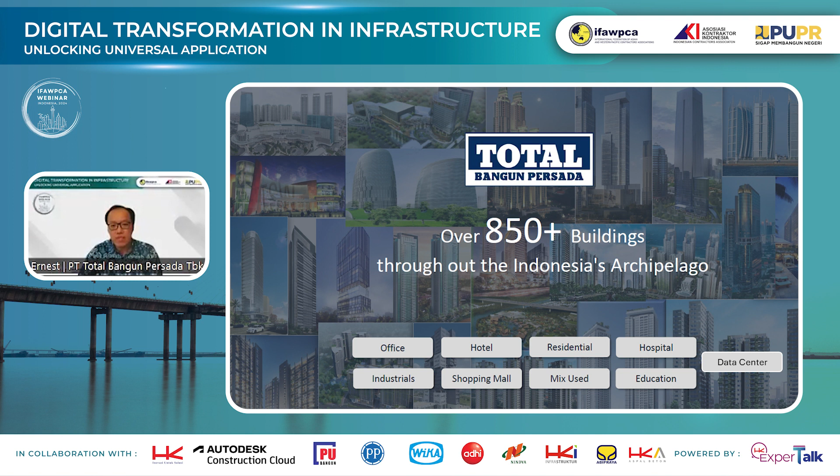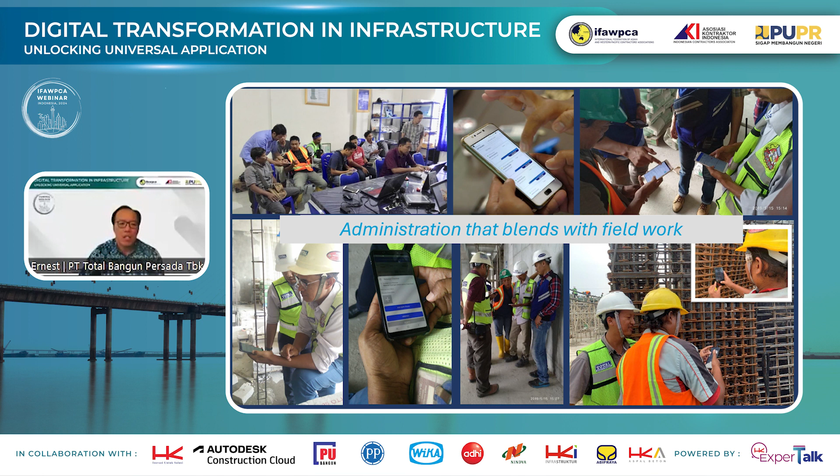So the administration blends with field work. What is actually changed in digitalization? I think there are 5 things that really change in digitalization. First is compliance - in digitalization, there is no procedure that is missed. Every process has to be defined in the system, so it must be complied with.

Strong planning - each process is performed sequentially, so the initial process determines the next process, so there must be strong planning. Digital readiness - no matter how good and sophisticated the technology is, only developed people can utilize the digital technology properly.

Transparency - in digitalization, every process has a digital footprint: what, who, when, how. So there's a timestamp in the system so that the data can be trusted - data driven. In digitalization, every process will be recorded and it will become big data, even from external parties. The big data can be analyzed and can predict future conditions to make decisions for business.

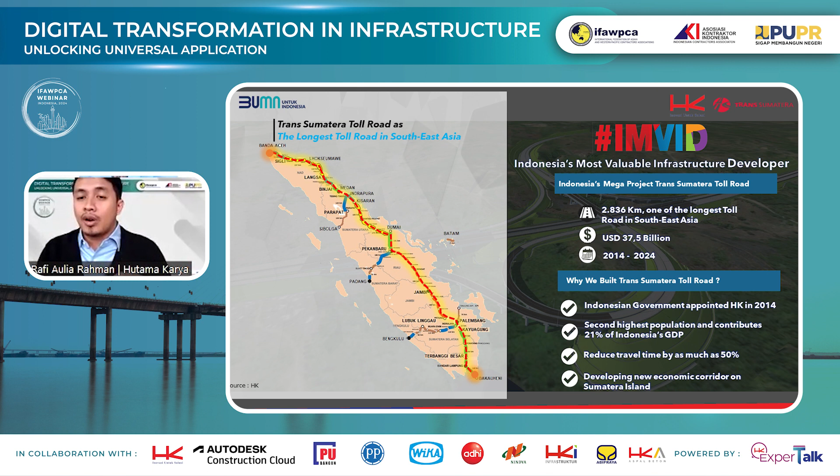So why did we build Trans Sumatra Toll Road? Besides the Indonesian government appointing Hutama Karya in 2014, Sumatra Island is the second highest in population and contributes 21% of Indonesia's GDP. The Trans Sumatra Toll Road can reduce travel time by as much as 50%, and is for developing a new economic corridor on Sumatra Island also.

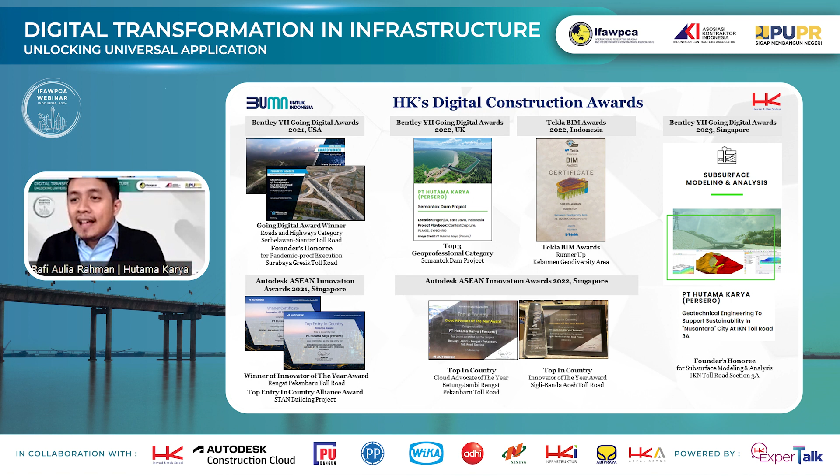Since 2020, Hutama Karya has been implementing building information modeling, and during 4 years of implementing BIM and digital construction, we have won several international awards, like from Bentley in USA in 2021, ASEAN Innovation Award 2021 in Singapore, then in 2022 from Bentley in UK, Autodesk ASEAN Innovation Award in Singapore, and Tekla. In 2023 we also got an award from Bentley in Singapore.

Besides that, Hutama Karya also carries out research and innovation in building information modeling and digital construction, and we achieved several awards in 2022. We won 2 Best Paper Awards in the field of digital survey at ConVR 2022 in South Korea. In 2023, we got a Best Paper in the environmental and sustainability category regarding carbon emission and digital twin at ConVR 2023 in Florence, Italy.

So now, how about the Sigli-Banda Aceh Toll Road project? This is one part of the Trans-Sumatera Toll Road, and Hutama Karya is the owner of the project. Because Hutama Karya is the owner, there are big differences between the owner perspective and the contractor perspective.

One important thing that makes a big difference between the owner perspective and the contractor perspective: if we are the contractor, we will talk about the contract value of the project. But because Hutama Karya is the owner of the project, we will talk about the investment value. Sigli-Banda Aceh Toll Road project has an investment value up to 833 million US dollars, or equal to 13.55 trillion rupiah. You can imagine how huge or how mega this project is.

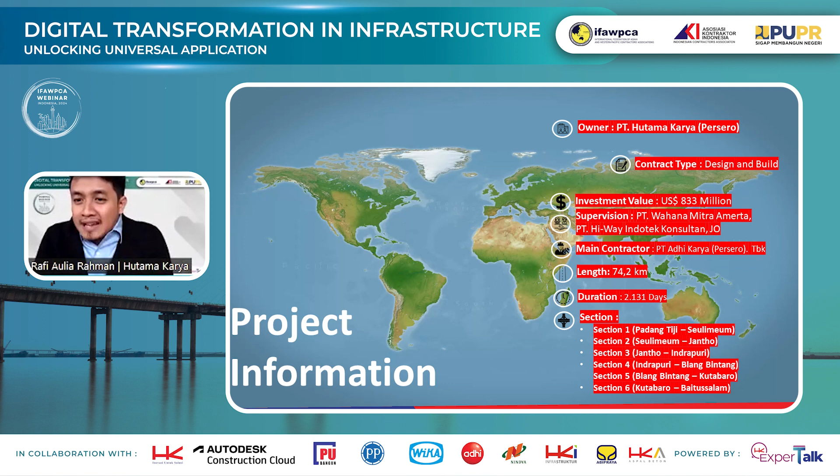Sigli-Banda Aceh Toll Road project connects from Sigli to Banda Aceh City with 74.2 kilometers length, divided into 6 sections, starting from section 1 in Padang Tiji until section 6 in Baitussalam. Nowadays, the project is fully operated from section 2 in Seulimeum until section 6 in Baitussalam, whereas section 1 is under construction and expected to be completed by the end of September 2024.

Sigli-Banda Aceh Toll Road project is very beneficial, as it can reduce travel time from 2-3 hours to just 1 hour.

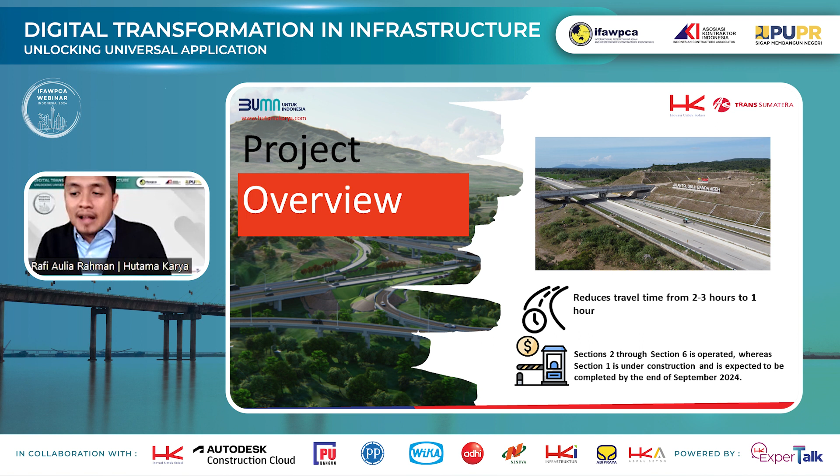Who are the stakeholders involved in the project? First, absolutely Hutama Karya itself. As the owner of the project or appointing party, Hutama Karya has an obligation to manage the construction process and the operation, as well as the maintenance of the toll road.

We have 2 specialist consultants: first is Wahana Mitra Amerta and Hi-Way Indotek consultant as supervision specialist consultants, and Virama Karya as independent quality consultant. To complete the whole project life cycle, our main contractor is Adhi Karya Persero. Adhi Karya has to design the model, submit the documents, and construct the toll road as well as the local design.

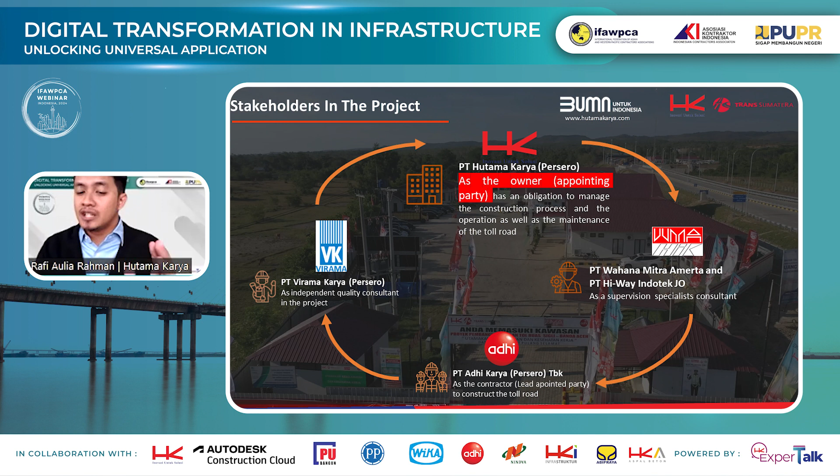Now, Sigli-Banda Aceh Toll Road project faces several challenges. First, it has a complex scope of work. With 74.2 kilometers length, we have extreme topography, and we have to construct 6 interchanges, 7 toll gates, 47 main bridges, and other structures.

And it must be completed within 2,131 days. So with the limited time, it requires accelerating the design process.

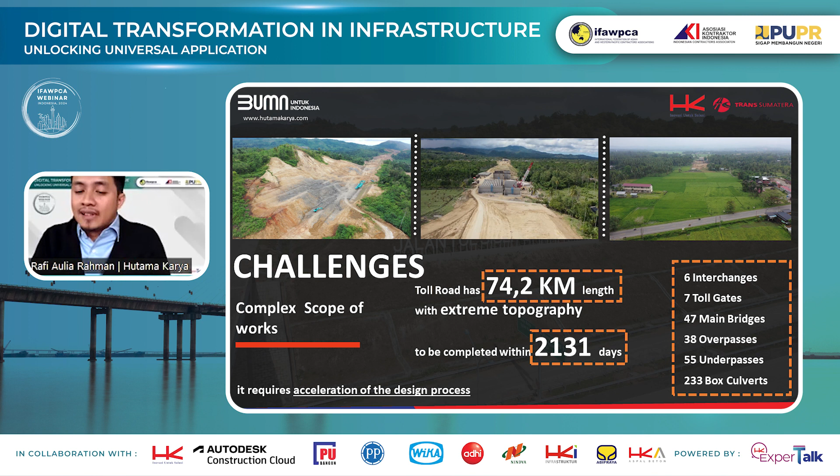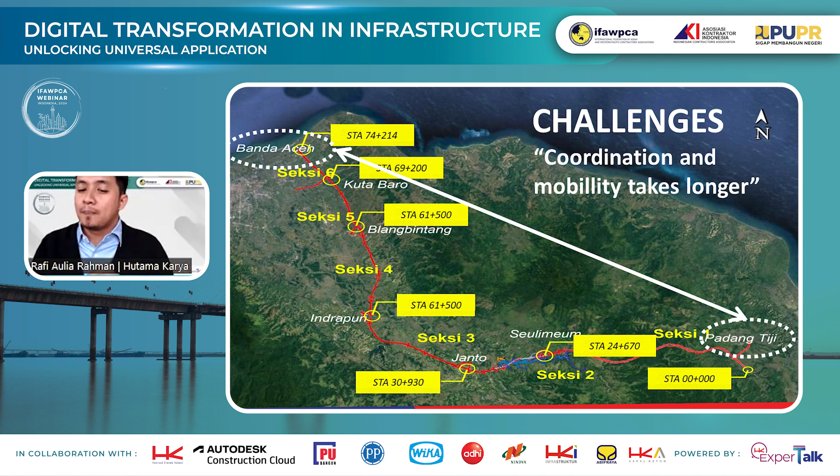With the 74.2 kilometer Sigli Banda Aceh Toll Road project, coordination and mobility takes longer because it takes up to 3 hours to get from the first kilometer point to the 74 kilometer point by car. So we require a strategy to optimize coordination and efficiency for sharing information and data between stakeholders.

Sumatra Island is one of Indonesia's islands that serves as animal habitat and protection forest. But in fact, there are above 130,000 hectares of deforestation in Aceh based on data between 2015 and 2023, reducing the animal population. So the Aceh Government and Natural Resources Conservation Center in Aceh require us to protect animal habitats affected by the toll road construction, so we need to collaborate and modify several designs to accommodate it.

Hutama Karya collaborated with other institutions to enhance the design. Hutama Karya appointed Adhi Karya as our main contractor to adjust several crossing designs and develop crossing designs for the sustainability of animal habitats using 3D model building information modeling.

The first modification is elephant bridges, allowing access from one side to the other through the bottom of the bridge. Second, we call it reptile tunnels, which involves changing the bottom of the box culvert so the humidity is designed to match reptiles' habitat. Third, we have an overpass for primate crossing, which becomes the most unique animal accommodation and will be initiated for the first time in Indonesia.

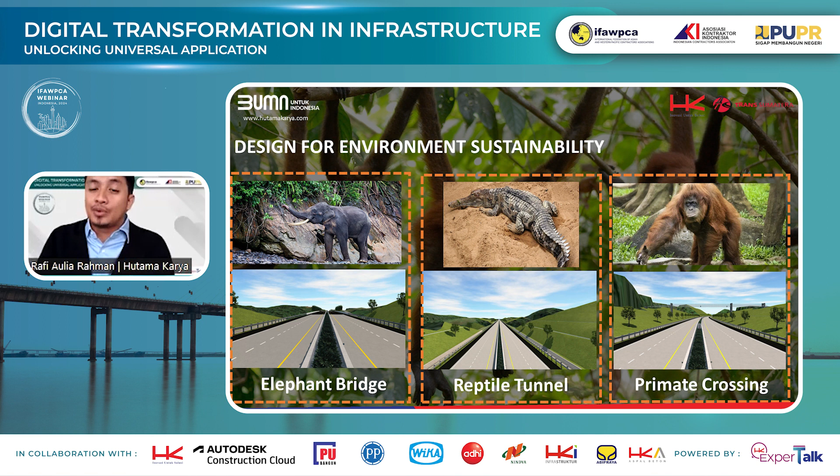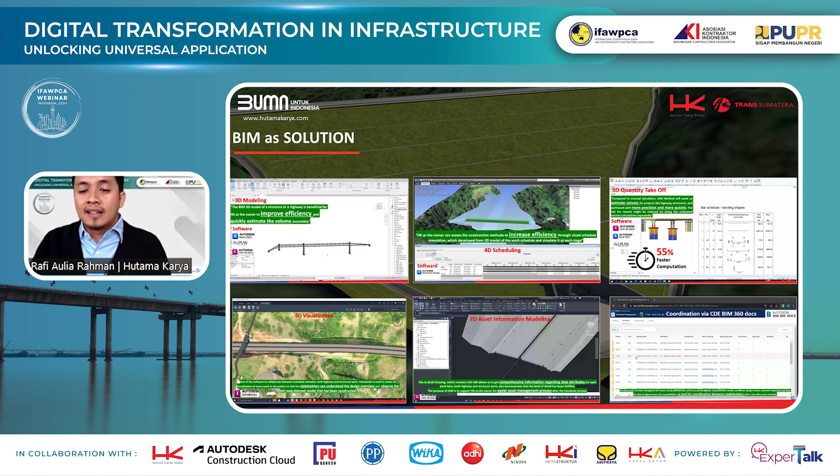Building information modeling is one answer to some of the problems we have. BIM approach is used by Hutama Karya as the owner of the project from the planning phase, construction, until the handover process. We may increase efficiency throughout the project life cycle by utilizing value-added techniques such as 3D modeling, 4D scheduling, 5D quantity takeoff, 3D visualization, 7D asset information modeling, and coordination by CDE BIM 360.

Utilizing building information modeling starts with 3D modeling. Both geometrical and non-geometrical data information are available through the 3D model. Hutama Karya, as the owner of the project, benefits from being able to compute volume quickly and accurately and get 3D visualization for each model.

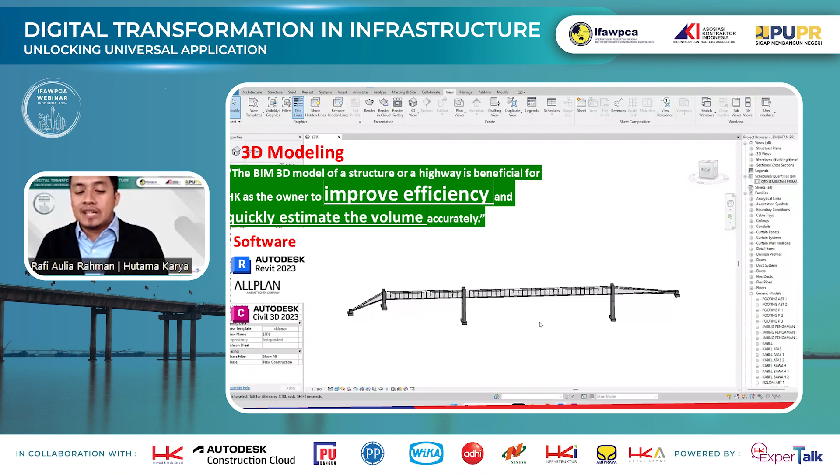With 4D scheduling, Hutama Karya as the owner can assess the construction methods to increase efficiency through visual schedule simulation, which is developed from the 3D model of the work schedule and simulated at each stage. So Hutama Karya may control the project progress of the contractor using the 3D model simulation.

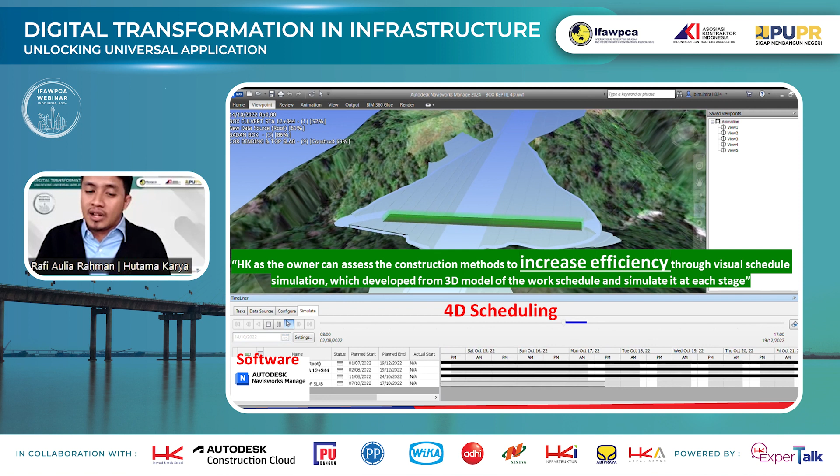Compared to manual calculation, the building information modeling method will assist us to estimate volume quickly, with 55% faster computation than manual computation. So the risk of rework might be reduced by doing the estimated volume calculation repeatedly.

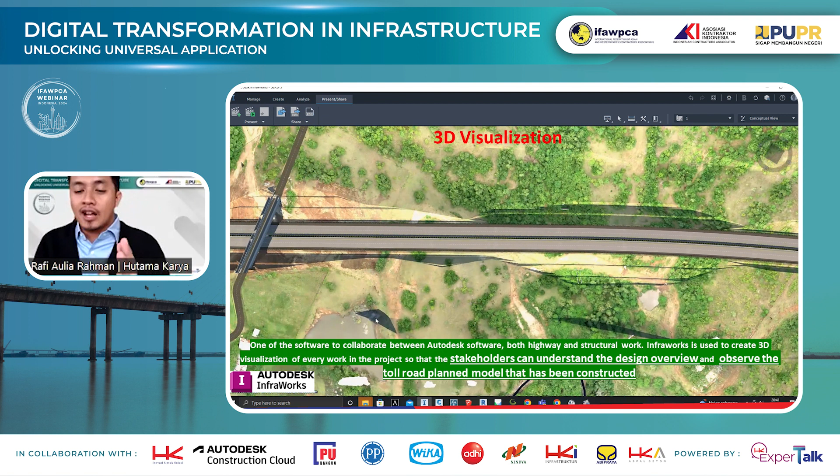Regarding 3D modeling, 3D visualization is utilized by Hutama Karya as the owner, for either highway or structure, during the plan stage, construction, and handover. So it can assist stakeholders in obtaining an overview of the project and conducting observations regarding the progress and realization of the projects through 3D visualization.

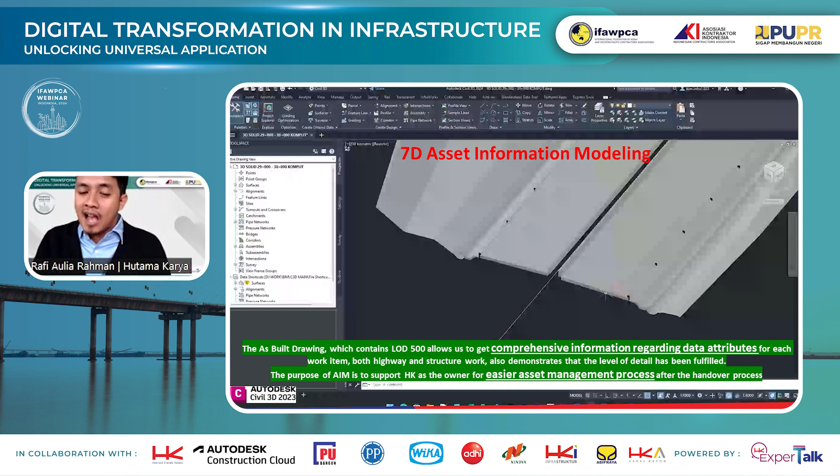We need asset information modeling in order to obtain asset information, especially needed for toll road operation. Every 3D model for as-built drawing must almost contain level of detail 500. So with the fulfillment of every work item, it can support Hutama Karya for an easier asset management process and maintenance after the handover process.

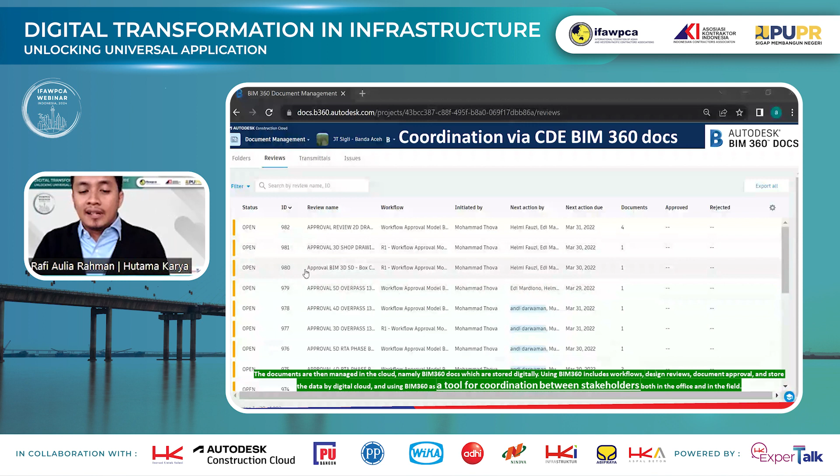As project owners, we want to ensure that all the data and documents are completely accurate. By utilizing the common data environment, we can collaborate on information creation, management and exchange during the construction phase. With CDE, the document process is more efficient and more accurate. It utilizes cloud-based technology to properly and efficiently transform data, including authorization and approval documents.

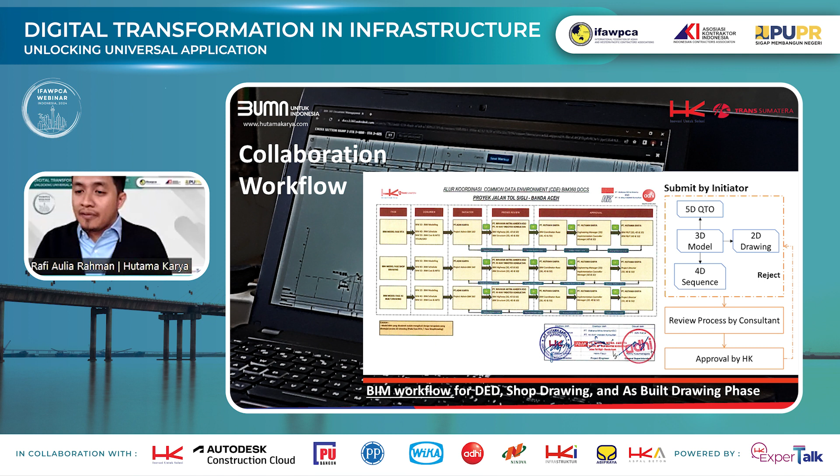So Hutama Karya as the owner provides the contractor and instructs them to use a CDE related to work drawings. We collaborate on CDE starting with detail engineering design on plan based, then shop drawing for reference construction on site, and as-built drawing for maintenance.

After setting the building information modeling implementation, we collaborated with other disciplines and technology, such as the photogrammetry method. Photogrammetry is a surveying method using a drone UAV. Utilization of photogrammetry can enhance stakeholder communication through better 3D visualization. Additionally, this technology improves field data collection process time efficiency, with 90% quicker acquisition than using a total station and 65% quicker than processing data using a total station.

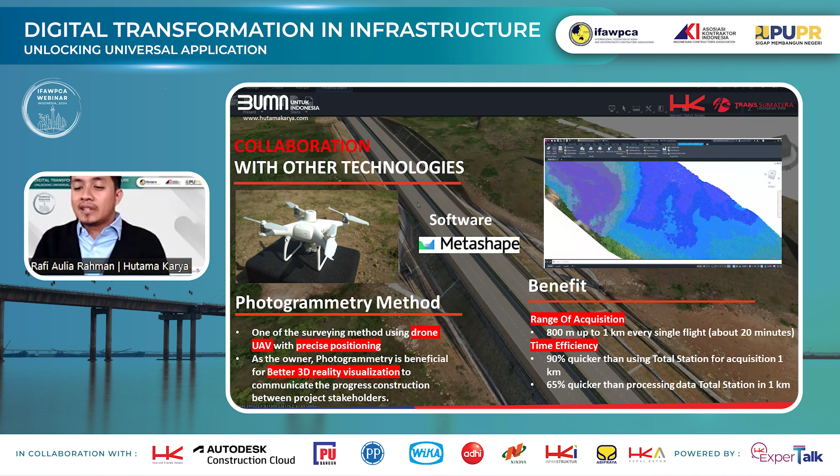Besides using a photogrammetry method, utilizing a mobile laser scanner can speed up the process to review and validate the as-built drawing data. Mobile laser scanner is beneficial for Hutama Karya as the owner of the project, with 76% faster review and validation of as-built drawing data, and increasing productivity of work up to 38%. So this technology improves the field data collection process time efficiency.

Next, we have a project management information system. This is another aspect of technology use. It allows us to monitor all data in real-time, accessible anytime and anywhere by all stakeholders, including CCTV, drone, land asset management, GeoBIM, photogrammetry data, and project progress. We truly have control over the progress of land acquisition due to the land asset management feature.

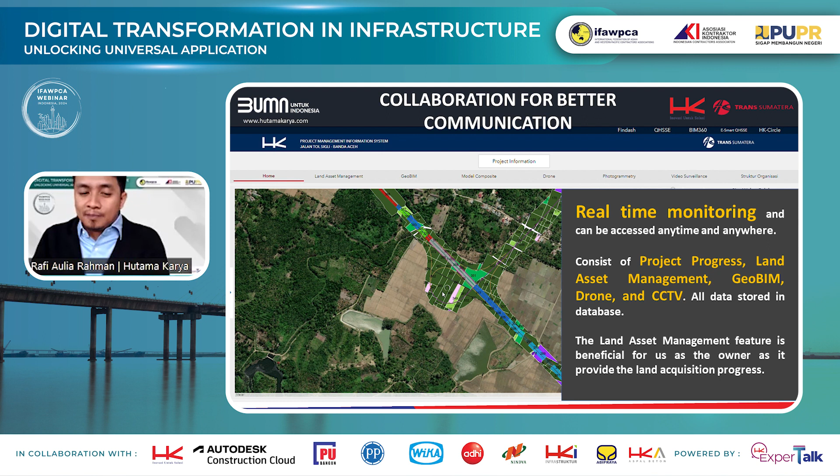So as the owner of the project, Hutama Karya has some benefits from the implementation of building information modeling and digital construction in Sigli Banda Aceh project. First, we can produce and deliver the product to stakeholders faster than manual drawings, with an efficiency up to 60%, either shop drawing or as-built drawing data.

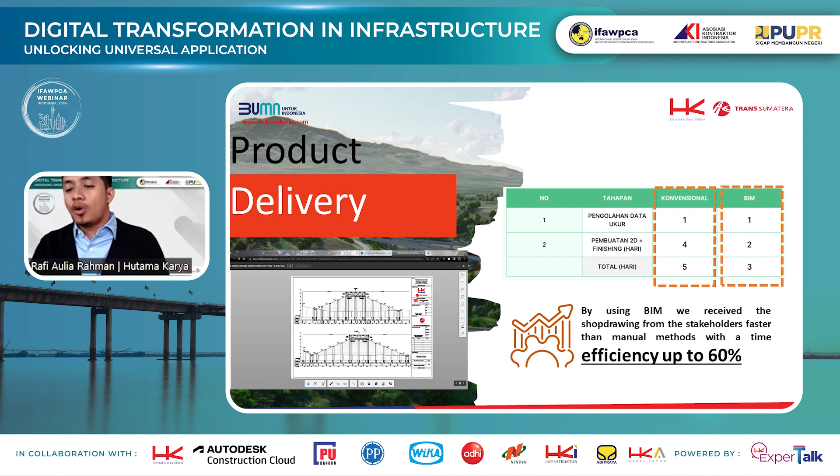Second, the implementation of digital construction in Sigli Banda Aceh Toll Road project will enhance the coordination process, making it more effective and efficient, with time saving up to 4% during the construction phase. Third is paperless - the amount of papers in the project can be reduced and the cost of coordination can be saved by more than 90,000 US dollars.

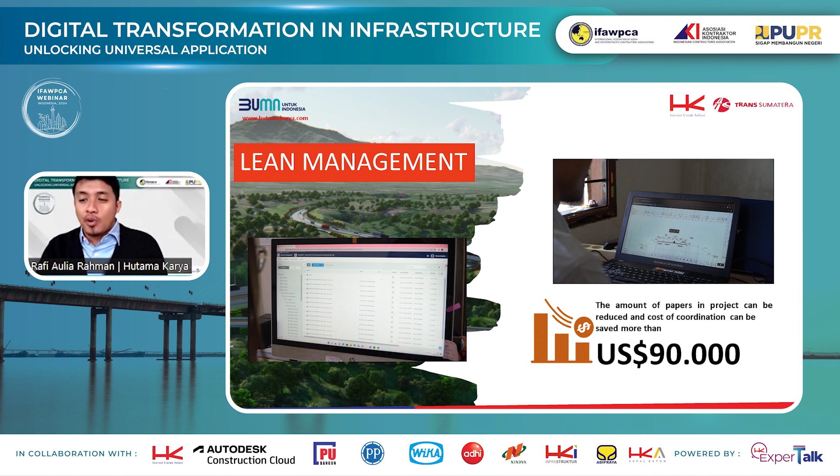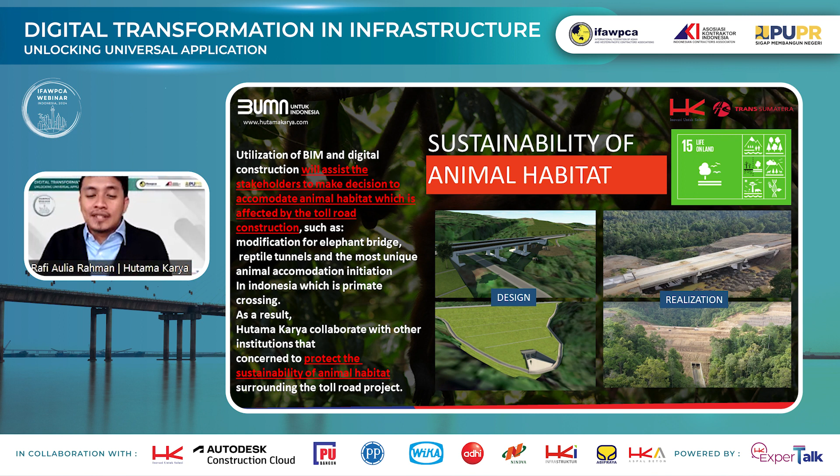And last but not least, utilization of building information modeling and digital construction will assist stakeholders to make the best decision on accommodating animal habitats affected by the toll road construction, such as modifying bridges for elephant crossing, reptile tunnels, and the most unique animal accommodation to be initiated in Indonesia, called primate crossing. As a result, Hutama Karya has collaborated with other institutions to protect the sustainability of animal habitat surrounding the toll road project.

What do we get during building information modeling and digital construction implementation? Here is our achievement for the last 3 years. In 2022, we got 2 achievements: first, we became first winner of HK BIM competition in Project Collaboration Award 2022, and we got an achievement from Autodesk Asian Innovation Award 2022 as a top 10 country innovator of the year award. In 2023, we got 2 achievements also: first winner of HK BIMCon - second winner of HK BIMCon in Project Collaboration Award 2023, and first winner of ASEAN Building Information Modeling Competition in 2022 in infrastructure category.

And in 2024, we get 2 achievements also: first, we become finalist in HK BIMCon in Lean Innovation Award 2024 in Hutama Karya Group, and become best toll road project of digital construction implementation in transformative toll road project in Hutama Karya Group.

Okay, that's our presentation today. Thank you very much for your attention. Assalamualaikum warahmatullahi wabarakatuh.

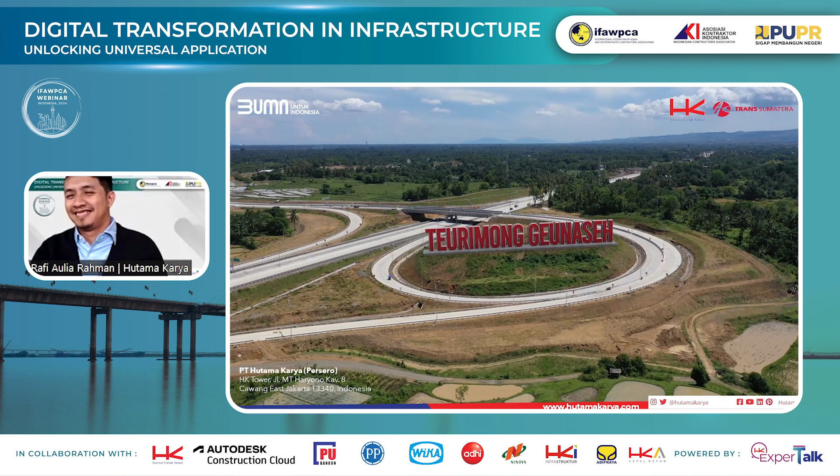Waalaikumsalam warahmatullahi wabarakatuh. Thank you very much again Mr. Rafi for another magnificent session. Ladies and gentlemen, it is really amazing that we have witnessed how technology and digital construction has brought us all into a new level of efficiency, effectiveness, as well as how digital construction and digital technology can help us sustain the nature and environment we are living in side by side.

As Mr. Rafi already presented to us, Sigli Banda Aceh construction is already within a very challenging situation, from point to point, the extreme length, the deforestation, as well as the challenge from the surrounding nature or animal habitat. Mr. Rafi already told us how digital construction and the usage of building information modeling is already bringing a lot of efficiency from costs, time, communication, and collaboration, and of course protection to the nature and sustainability of the environment itself.

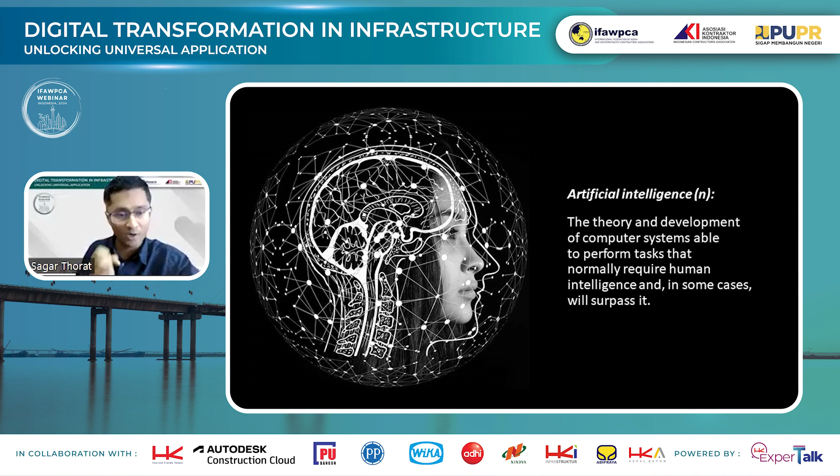Now, yes, AI is having a moment today. It is in its nascent stages, and over the last 5, 6 years we have seen this, but it's evolving faster than we think. It's going to be very rapidly approaching into our workspace, and we will be able to go more into predictive and autonomous mode in the future.

There is this shift all over the world. We do have companies getting disrupted on a daily basis who are not adapting to the new tech arena, but we do see a tremendous amount of interest specifically around how multiple geographies are looking at it, multiple superpowers are looking at it, or how the AEC industry itself is looking at it.

But the crucial part here is going to be how can we make our processes in the architecture, engineering, and construction environment more sustainable with the application of AI. Because that is where the value would be, because of the amount of material wastage that the construction industry comes out with on a yearly basis. It's just tremendous - it's in trillions of dollars in the amount of CO2 generation that we are doing today.

So AI for us holistically would really be useful in this area of achieving sustainability in our processes, and at the same time to be able to reduce carbon and support the net zero goals of our region itself.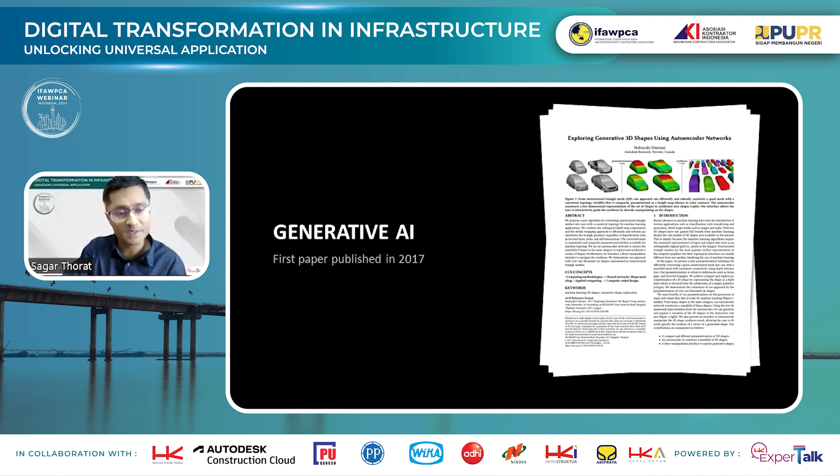Autodesk also has an AI lab, and you can participate in the communities on GitHub, give your comments and understand these as well. Join the Dynamo forums, join different forums to participate and understand what Autodesk is doing in the AI space. As of this year, we have published more than 60 plus AI research papers, among the world's leading publishers, together with 3D and geometry design, worldwide.

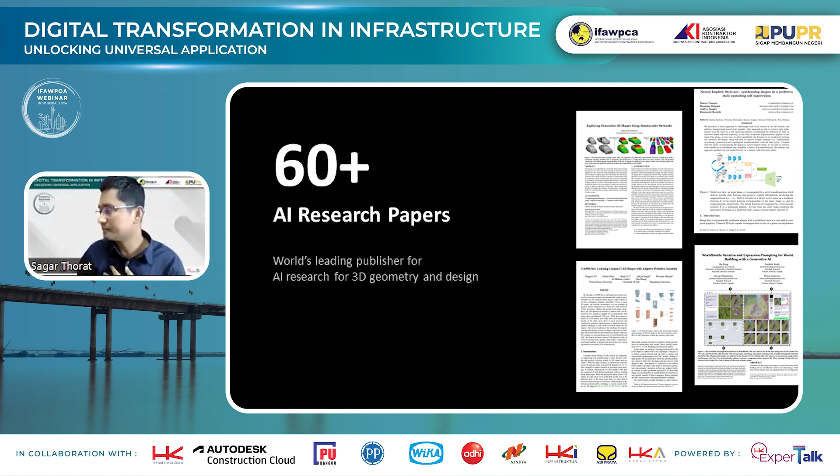Now, Autodesk's AI mission — and I'm going to read this out because it's from the corporate side of things. As the trusted technology partner for design and make worldwide, Autodesk has a mandate to harness the power of AI on behalf of our customers, and we have a duty to do so responsibly. Autodesk takes this responsibility very seriously, and our corporate works every day to make sure AI is utilized in the right way, and the data is harnessed securely.

So where is Autodesk AI in AEC today, and how can we utilize it in our daily processes? First things first, we begin right at the first stage. When architects, master planners, urban designers, or even civil designers think about designing our cities, establishing the sustainability requirements in the beginning becomes quite crucial.

Today with Autodesk Forma, which is our AEC industry platform, we have launched multiple capabilities to harness embodied carbon, operational carbon, and to leverage these technologies right from day one at the early stage of design itself.

One such example is the operational carbon analysis. As you begin your conceptual design journey, we are already leveraging artificial intelligence to understand the climatic aspects and to bring operational energy analysis into your regular workflows based upon the building's orientation, facades, and materials selected. Operational energy can directly be predicted, and you can understand how much kilowatt-hours of energy you are going to consume in the future based upon the HVAC system chosen, the materials chosen, the density of the building, the height of the building, and so on.

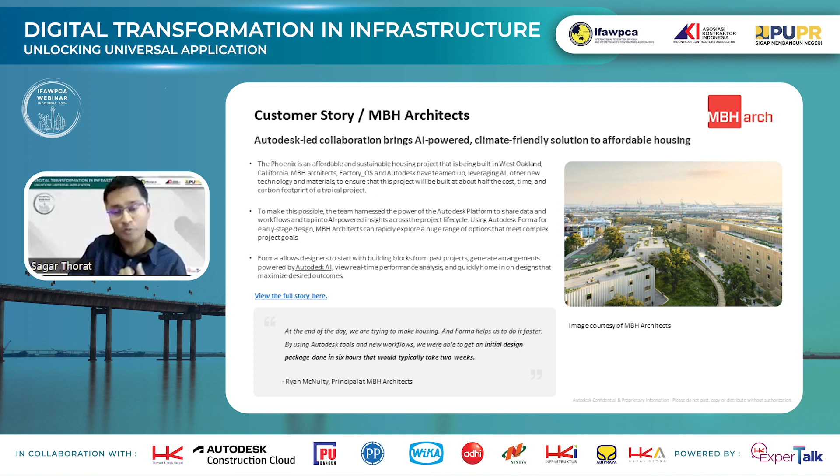We have customers today utilizing Autodesk Forma with large language model integrations to enable sustainable living. This is an actual project by MBH Architects, and Factory_OS are the developers of this particular project. They were able to harness a lot of AI-powered insights to achieve their sustainability outcomes for the project. These were the project goals set up in the beginning, and they enabled processes and machine learning algorithms to track these goals using Autodesk Forma, as well as Revit's modeling engine integrated with Autodesk Forma, to give a lot of design options. That's where a lot of these aspects were taken care of.

Now let's look at how this works in a simplistic manner. Configuration is the first thing — you have your data input, then a generator, which integrates your large language model. Then you have an evaluator, which evaluates based upon certain criteria like construction, carbon, views, acoustics, daylight, and cost. Ultimately, the optimization is based upon these multiple sources of large language models, which enables suitable configurations for the particular building design. And Forma enables this through its APS and API workflows.

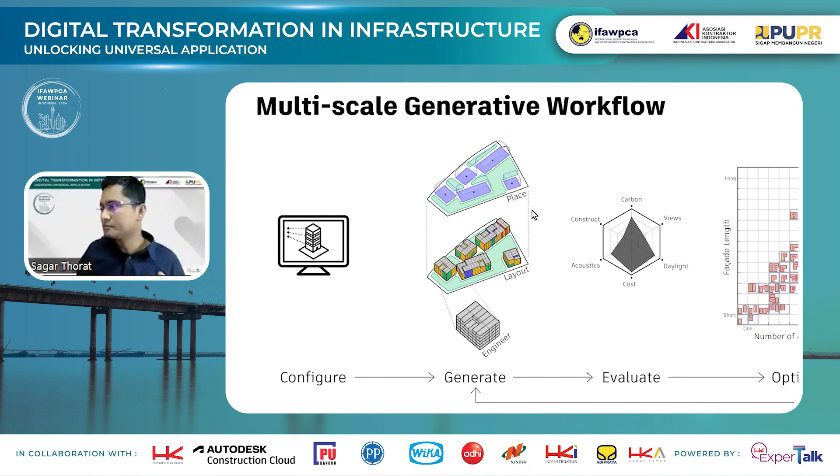For those of you new to Autodesk, Forma is part of the Autodesk AEC collection, which has democratized the usage of BIM over the past decade. Today, Forma is part of the AEC collection so that you can start your design journey right from day one. So I will take this liberty today to open that platform in front of you, because I love it as an architect and it's beautiful.

So this is just an example of one of the sites here. What I'm doing is I'm going to use the Explore AI tool in Autodesk Forma. I'm going to choose a particular site like this one, and enable it based upon the constraints on the right-hand side.

There are constraints on the right-hand side. For example, we have the division width, we have the number of floors, and multiple other aspects. But I'm going to just first start with the basics. I'll click the plot, and you can see that now the AI, based upon the input data, is giving me multiple configurations.

I'm able to choose between different design options, and you can see how the options are automatically getting updated and beautiful designs are coming up for me. Now I have a choice what to choose for myself, and I can look at 70 to 80 options of these. If I don't like these options, I can trigger the data again.

I can, let's say, look at this - I probably don't want a mixed use and I'm not really looking at linear buildings, but I want to actually just look at clustered city blocks. So the AI will automatically generate these options for me.

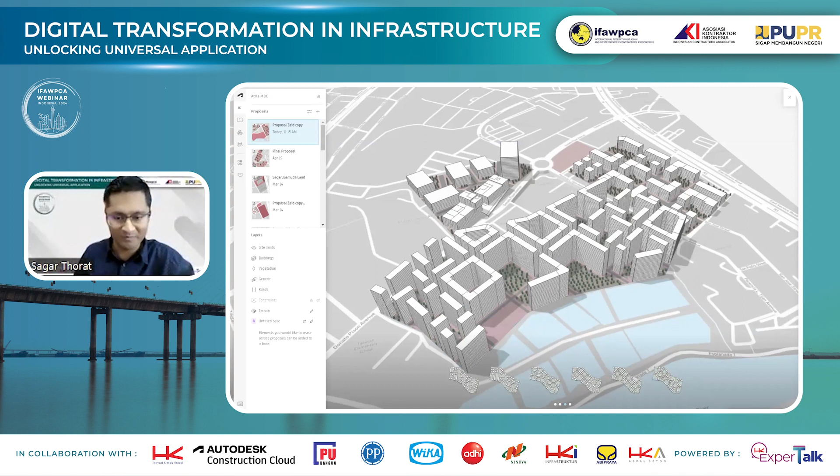So that's just a glimpse. Go ahead and get your hands dirty and get started with AI and machine learning using Autodesk Forma. I would encourage all of you to do that. Whoever is an architect or a BIM professional, please test Autodesk Forma for yourself and let us know how your experience is on that front.

Now, that was Forma Explore AI. Now let's look at what the final outcome of the design was. This is the final outcome of the design. As we speak, I think the construction of this might have already been complete, but it's a very good example of how large language model integration using Forma AI has enabled this workflow.

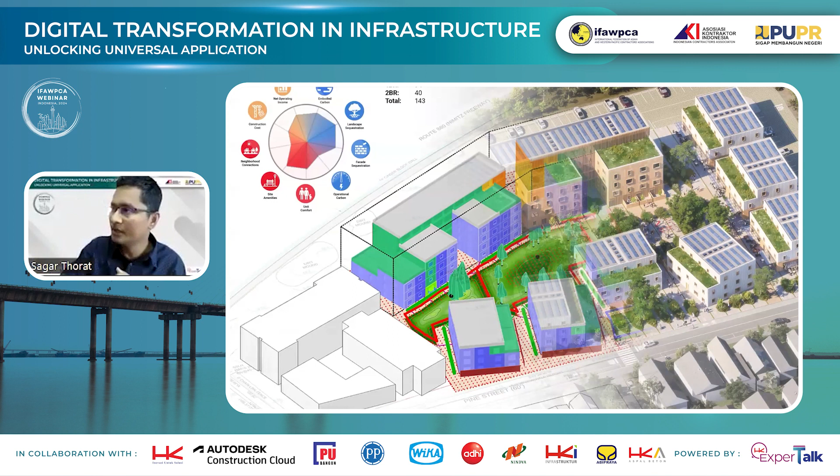Now, let's look at some other processes. When we look at water network design, using either Civil 3D or InfoDrainage - InfoDrainage is part of the Autodesk portfolio, which can be implemented for your drainage and water network designs, flood modeling, and so on. But you can actually even start looking at machine learning algorithms getting incorporated in these designs.

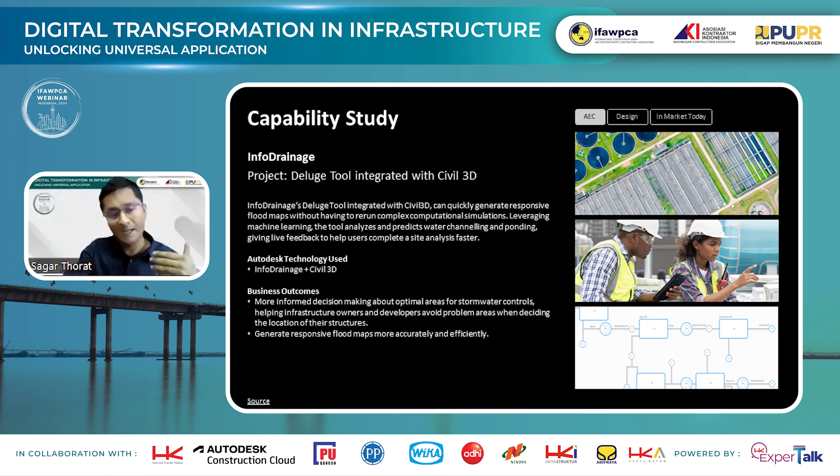So one such example is the tool called Deluge. The Deluge tool is a machine learning tool that is integrated with InfoDrainage and works on top of Civil 3D as well. You're able to bring your Civil 3D models into InfoDrainage and vice versa, and InfoDrainage uses this machine learning algorithm, which is your Deluge.

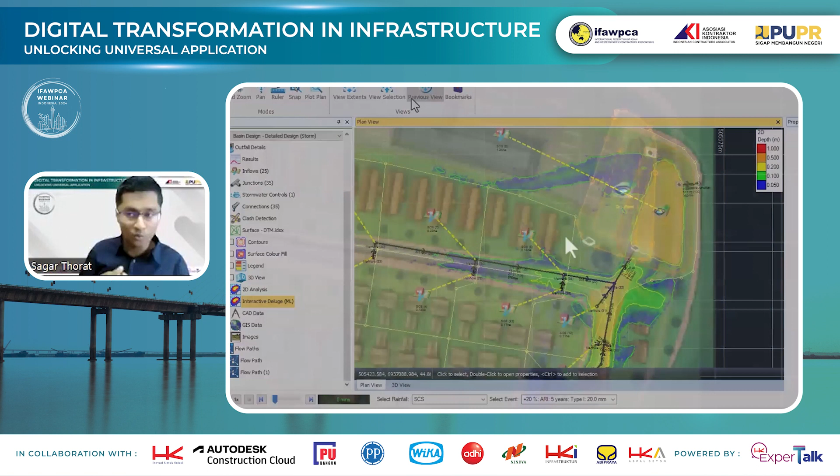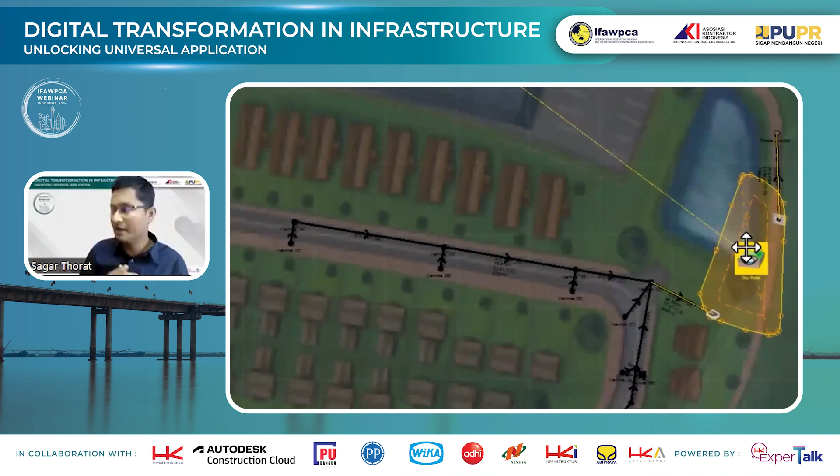For example, on the right-hand side, I have this particular pond, an area of water, which I want to identify how much concentration will be there in terms of your water networks. So I can move the pond around and say where can I position it best such that it will give me the best network and the least amount of concentration of water, avoiding flooding and leakages.

So that is some machine learning for you within InfoDrainage to be able to enable more sustainable and responsive designs for better water management. So take note of this - InfoDrainage and InfoWorks ICM are tools that integrate a lot of artificial intelligence and machine learning for you to design better water systems and manage floods for your regions as well.

Now, looking at other aspects, Dynamo is another tool that you work with in Revit. I also wanted to give you a glimpse of the data analytics in Dynamo. So what I have here is a Revit model in the background, and my objective is that I don't want to go to the schedules and so on.

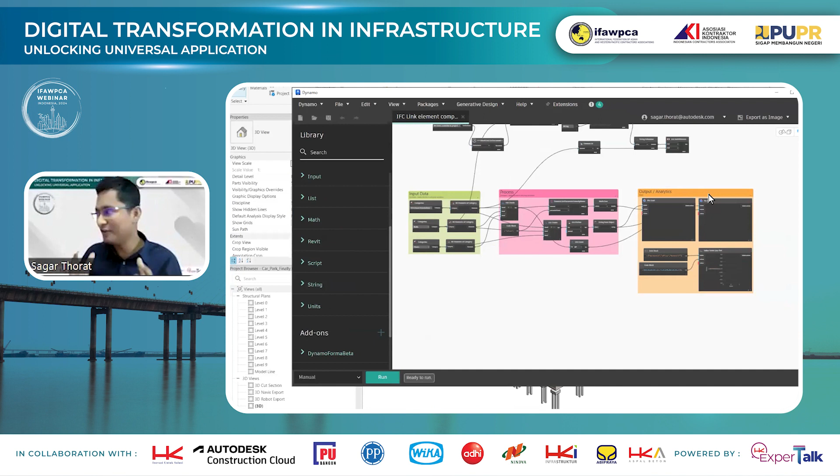I want to understand how much amount of concrete is there in my columns, in my beams, in my floors. And I want it in a graphical way because I am a new age designer and I really want to have that analytics. So what I do is I'm just pulling in that data - for example, I'm bringing in structural foundations, walls, and floors.

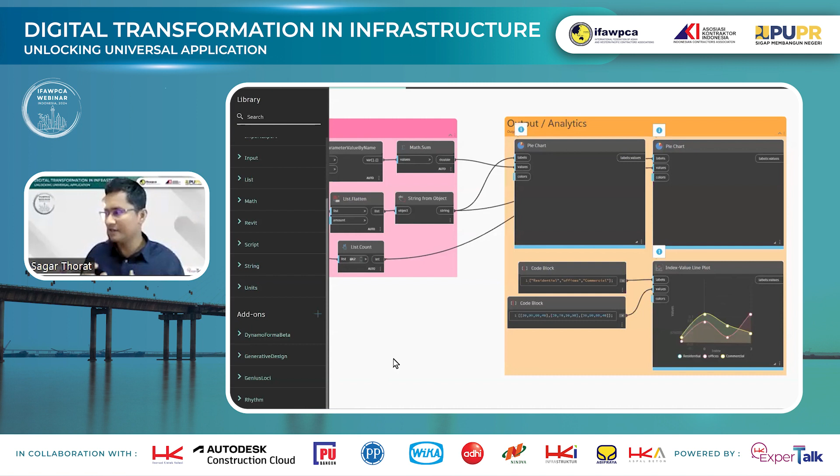I'm extracting the volume parameter from Revit, and I'm running this algorithm in the background, and the data analytics will immediately give me information. As I change the information in my model, this gets updated. So this is where the new age designers would want themselves to be, where we want to start looking at

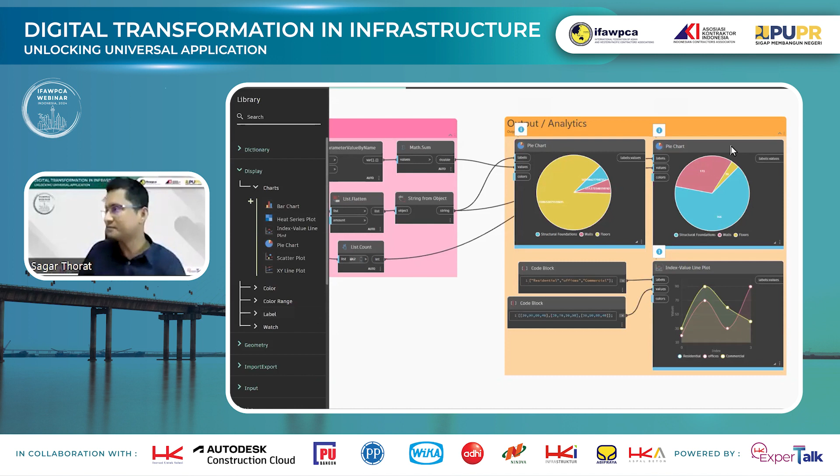pie charts, graphs, and Dynamo allows you to do that today within its native application from 2024 Revit onwards. You can start looking at bar charts, pie charts, scatter plots, heat series plots - all of these can be leveraged upon. You can even use Python if you want to, but you don't actually need any coding language to use Dynamo in Revit. So that's Dynamo in Revit for better data analytics and data management.

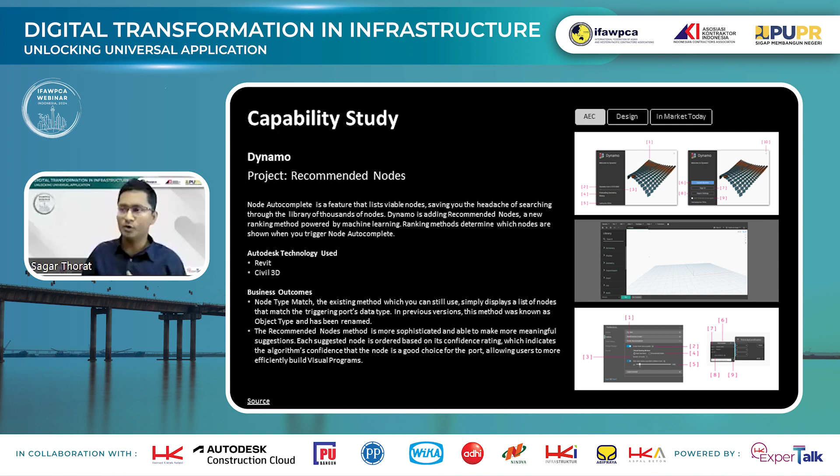Now going back from Dynamo, we move to Autodesk Construction Cloud. A lot of you are already using BIM 360, Docs, BIM Collaborate Pro, BIM Collaborate, Autodesk Build, Autodesk Takeoff - all of this is part of Autodesk Construction Cloud. And Autodesk Construction Cloud has multiple machine learning and AI features. One of them is the Construction IQ that you might use on a daily basis.

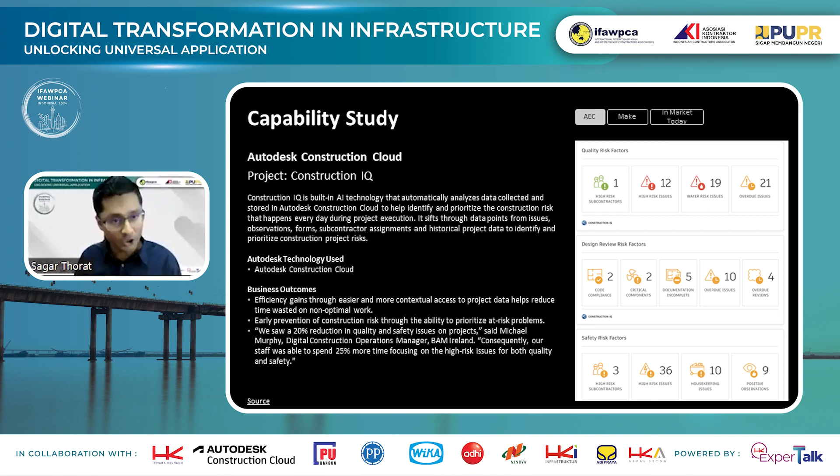So how does Construction IQ work? It's actually a data connector for reporting all the information that you bring onto the Autodesk Construction Cloud, that helps you manage your project risks in a better way. And it will set triggers - you're able to set some benchmarking in terms of bringing in this data onto the Autodesk Construction Cloud, such as quality risk factors, design review risk factors, RFI risk, safety risk.

All of these are already part of your Autodesk Construction Cloud, and Construction IQ brings machine learning to the table so that you're able to extract this information and look at it from the insights point of view, whether it is design, project controls, quality, safety, and so on. So that's Construction IQ for you.

Now, another machine learning feature in Autodesk Build is auto tags. Looking at photographs from your site, the machine learning algorithm already understands whether it's rebar, whether it's people on the site, whether it is formwork, and you can start tagging these photographs automatically using the machine learning within Autodesk Build with auto tags.

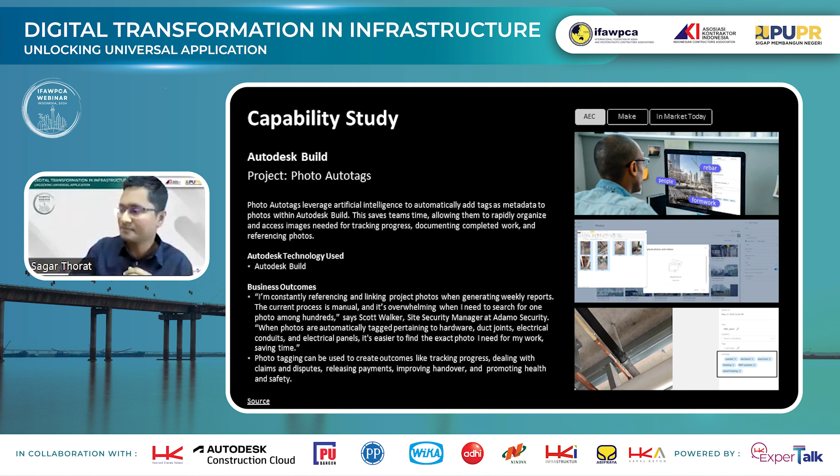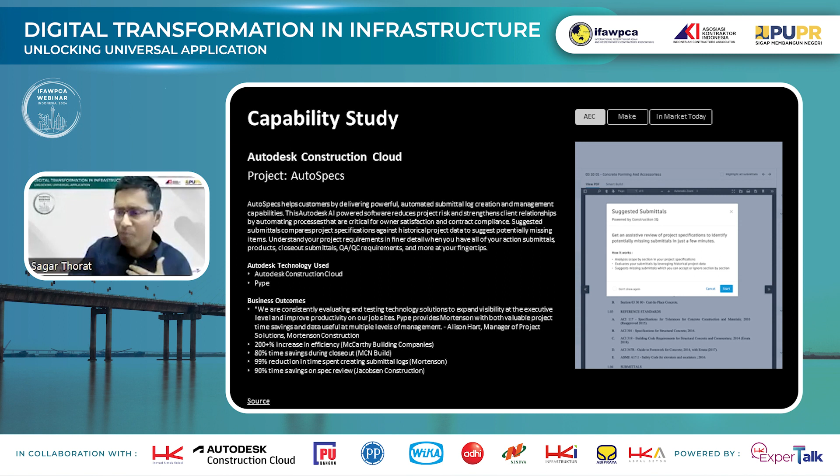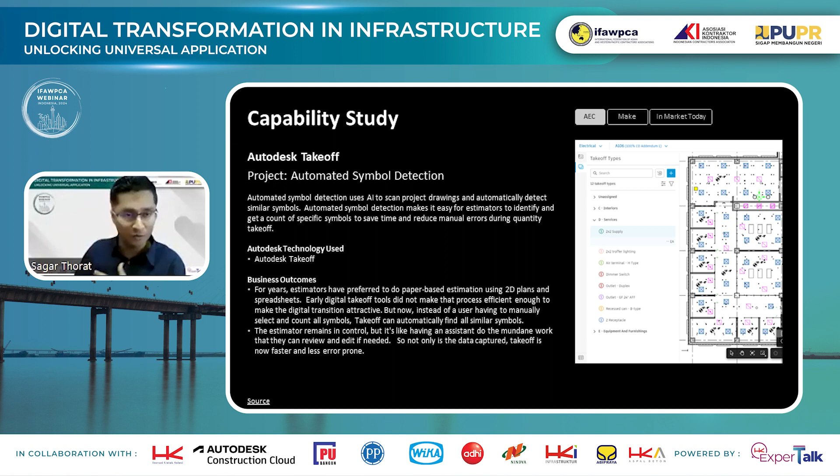Now, Autodesk Takeoff, part of Autodesk Construction Cloud, has automated symbol detection for 2D takeoff. 2D takeoff was already part of Navisworks, but Autodesk Takeoff actually brings it to another level and enables you to do so in your Autodesk Build workflows and Autodesk Construction Cloud workflows. So let's look at that feature, how it works.

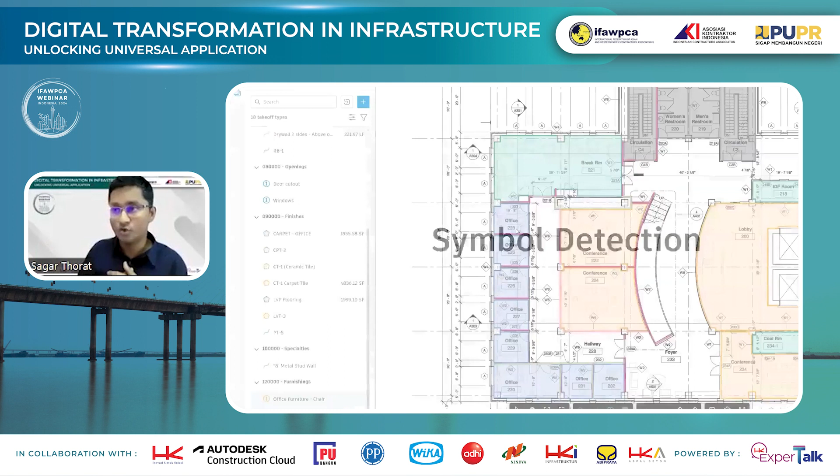Within Autodesk Takeoff, the symbol detection - let's say you have this 2D drawing in front of you in Autodesk Takeoff, you're able to choose from different symbols. Let's say I'm now identifying a particular component like a chair or a door and assigning a shape to it - the takeoff feature, which will automatically detect these symbols, will be able to assign these shapes to a typical object, and automatically it will start looking at these assignments.

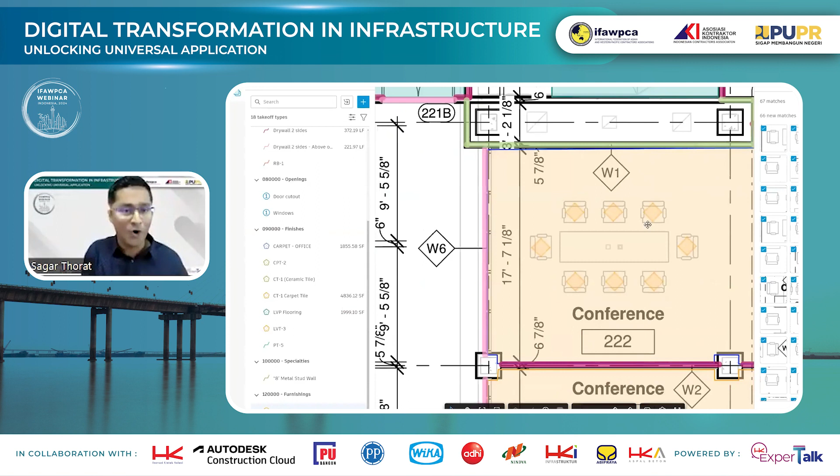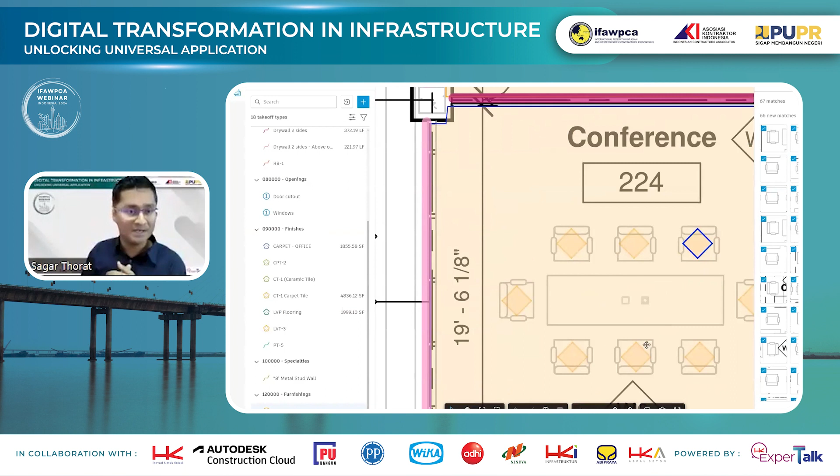So if I'm just choosing one particular room, it will auto assign these symbols and detect them for you, and it will start applying that. You see, automatically it's applying all the symbols because I am training the computer before, asking the machine learning to identify these objects and automatically go and tag them. That's Autodesk Takeoff tag for you, which enables automated symbol detection, and that works for all objects, leveraging machine learning to streamline and make your data analysis much faster.

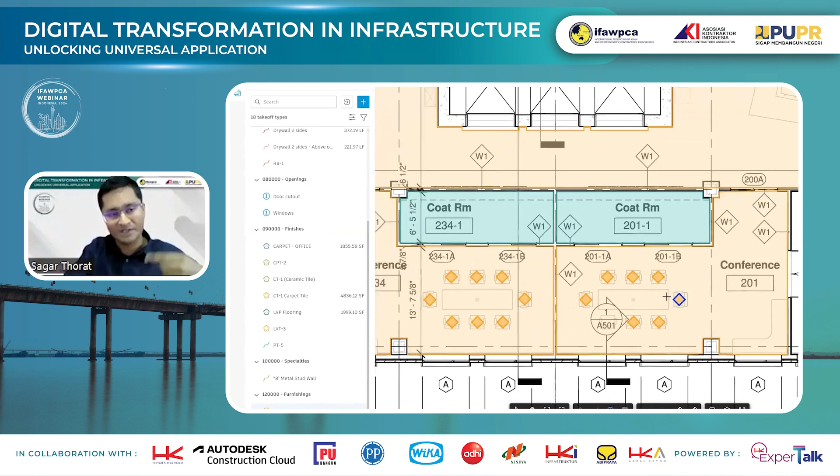And that's it, I think, great - 40 seconds to go. And that was Autodesk AI for you guys.

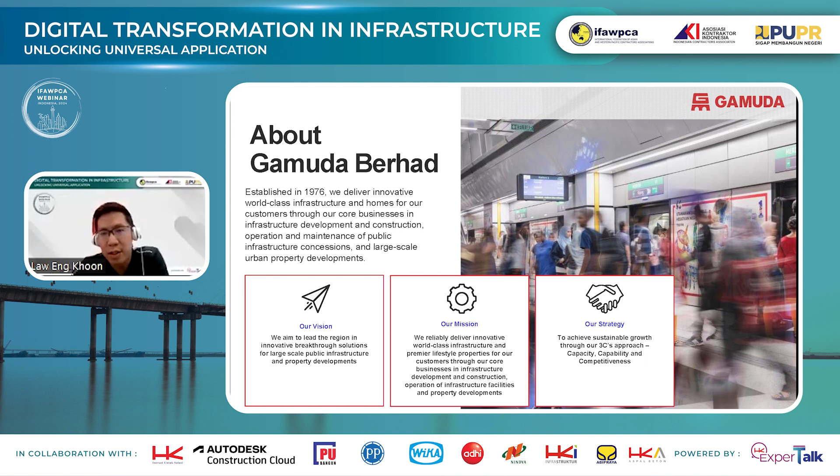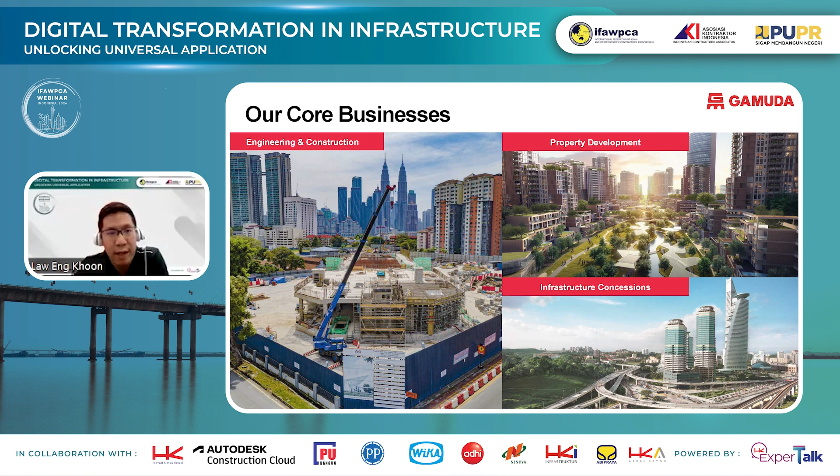Since its establishment in 1976, Gamuda has been at the forefront of delivering innovative infrastructure and homes for our customers. Gamuda operates across 3 core business segments: infrastructure development and construction, where we play a pivotal role in building essential structures and facilities that drive progress and connectivity. We also have the operation and maintenance of public infrastructure concessions, ensuring critical facilities and services are efficiently managed and sustained for the benefit of the public. And the third segment is large-scale urban property development, where we design and create vibrant communities that enhance the quality of life for residents and contribute to the sustainable growth of cities.

Now we have an innovation hub at our headquarters, a dedicated space where ideas flourish and creativity thrives. We also have our Gamuda Excellence Transformation Team, which plays a crucial role in driving excellence and innovation across all aspects of our operations.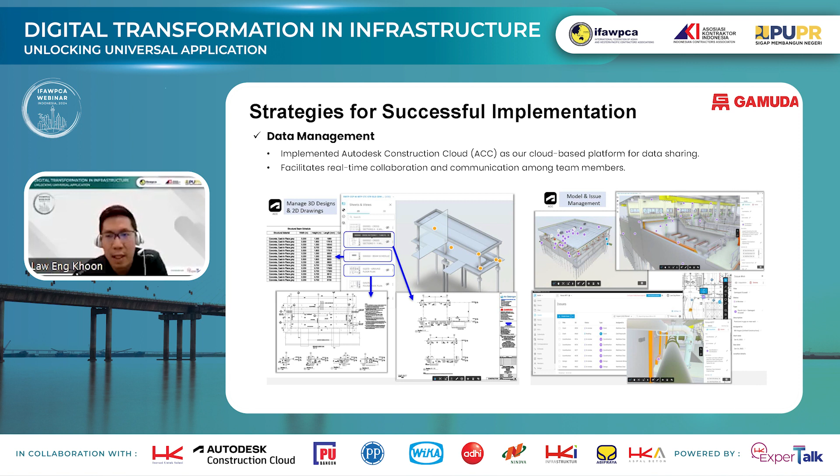For data management, in a modern construction project, efficient management of data is very important, especially for complex projects. To address these challenges, we have implemented Autodesk Construction Cloud as our primary cloud-based platform for data sharing and collaboration, offering a comprehensive suite of tools and solutions specifically designed for the construction industry, providing a centralized platform for managing data throughout each life cycle.

For design and collaborative planning in BIM, since the initial design stage began, we have mandated all teams to create a 3D model for each individual discipline, including architecture, structural, process, system, and mechanical, electrical, plumbing system. This approach facilitates improved planning and visualization by integrating all types of data into a single digital model.

Now all stakeholders can visualize the entire building and all its systems in a unified platform, which is the Autodesk Construction Cloud, fostering a collaborative environment among consultants, engineers, specialists, and other contractors.

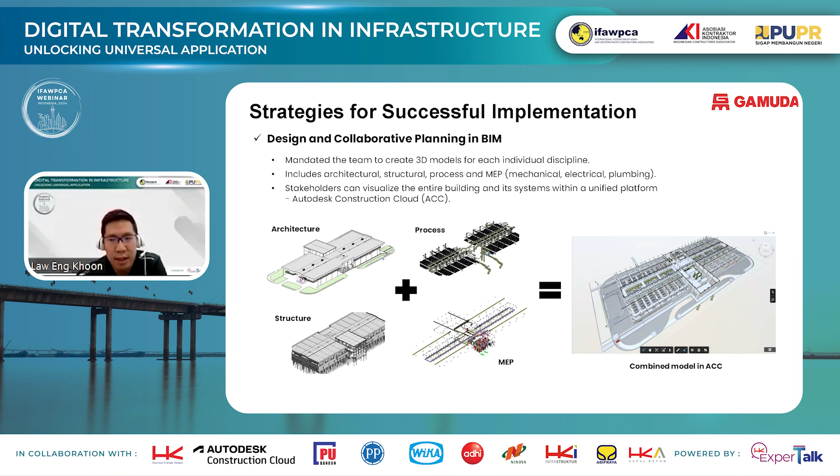As a better approach to transforming the construction landscape, we also decided to use Autodesk BIM Collaborate for our BIM models coordination during the construction stage. This innovative platform streamlines collaboration among engineers, construction teams, and subcontractors.

With real-time access to project data, streamlined communication, and comprehensive project management tools, Autodesk BIM Collaborate has revolutionized the way we work together, ensuring efficiency, accuracy, and ultimately delivering better outcomes.

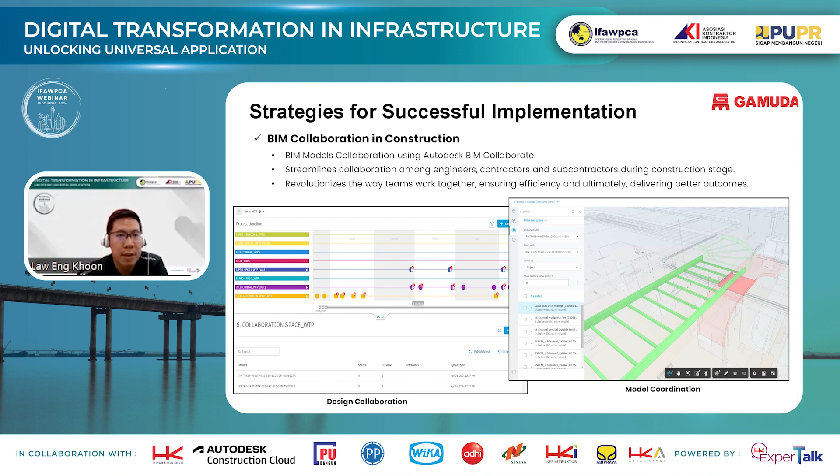For training and skill development, we usually provide regular hands-on practice opportunities for the team to apply their learning in real-world scenarios. This can be done through interactive workshops or project-based training. Practical exercises and projects really help them gain confidence and proficiency in using digital tools effectively.

We focus on providing training to ensure the team is well versed in the functionality and features of the digital tools we are using. This includes BIM training on BIM modeling software, data management platforms, collaboration tools, and other relevant software applications.

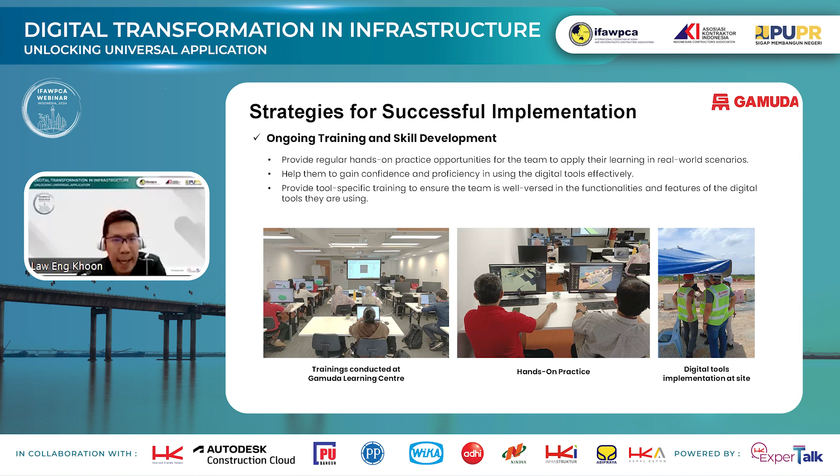Next is the integration of innovation technologies and tools. In the RASA WTP project, survey drones are deployed throughout the construction project to capture aerial imagery and monitor the project progress. By integrating this drone survey data with BIM, stakeholders can now create an accurate 3D model of the site environment, enhancing the precision of the project spatial information.

Integrating BIM with GIS involves aligning the BIM model with geographic coordinates and referencing them to the real-world location. By seamlessly integrating BIM with survey drone and GIS, our stakeholders can now leverage the power of this spatial data to improve decision making, enhance project efficiency, and achieve better outcomes.

Despite our best efforts in implementing BIM and digital technologies in this complex infrastructure project, we have an onset of challenges. One of them being technology adoption. Technology has revolutionized the construction sector, offering improved efficiency, collaboration, and project outcomes. However, realizing this benefit requires the widespread adoption, including among the subcontractors who play a vital role in project execution.

One of the primary challenges is the lack of awareness and understanding of BIM among the subcontractors - we're not talking about the client, but the subcontractors. Besides that, subcontractors also encounter technical challenges during implementation, such as software integration issues and modeling issues, without sufficient support. To address these challenges, our BIM team provides insight into BIM capabilities and necessary training to subcontractors so they acquire the skills and competency to effectively use these BIM tools. Without adequate training programs tailored to them, adoption efforts may falter.

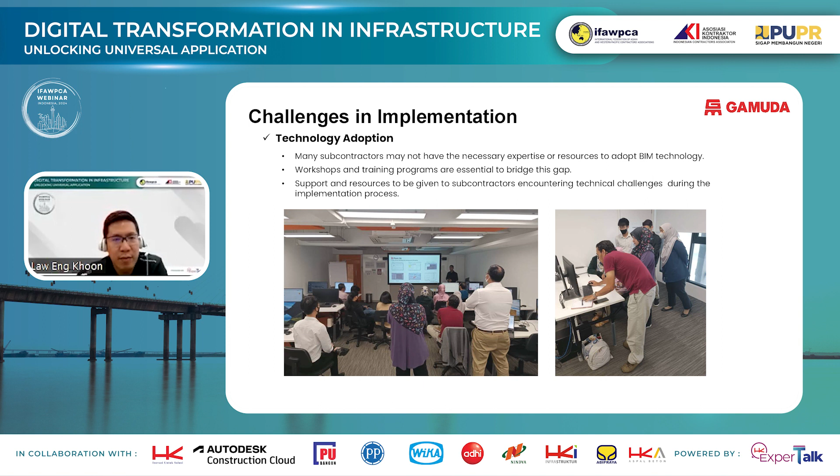Next is data quality and consistency. Maintaining the quality and consistency of data input across different subcontractor models is crucial for the overall success of BIM implementation, as BIM relies heavily on accurate, reliable data to generate models that represent the physical and functional characteristics of the construction project. Subcontractors must ensure the integrity of the data they input into the BIM model, including geometry information, materials, properties, and project specifications.

Therefore, establishing data standards is essential to ensure consistency across the different subcontractor models within a project. This can be done by standardizing naming conventions, file formats, attribute definitions, and data exchange protocols. We check the models from time to time in our team to ensure their submission in ACC, ensuring that the data provided is relevant, up to date, and aligned with the project requirements and milestones.

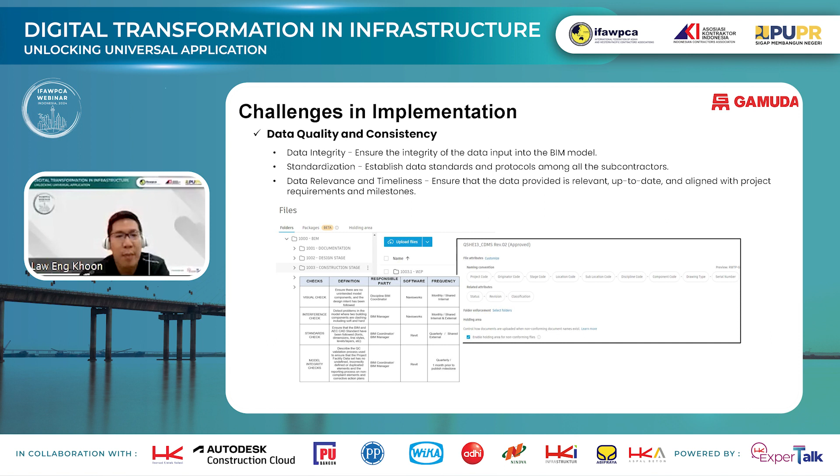Next is the interoperability issue with software compatibility. Subcontractors often use different BIM software tools and platforms based on their specific needs, preferences, and contractual requirements. For infrastructure they use Civil 3D, for plant processes they use Plant 3D, and for buildings we use Revit software.

This interoperability facilitates the collaboration workflow among all the different subcontractor disciplines, allowing them to share model data and documents in real time. Cloud-based BIM platforms and collaboration tools enable our subcontractors to collaborate remotely, regardless of their geographical location, and this real-time collaboration fosters greater transparency, communication, and coordination, leading to improved project outcomes and stakeholder satisfaction.

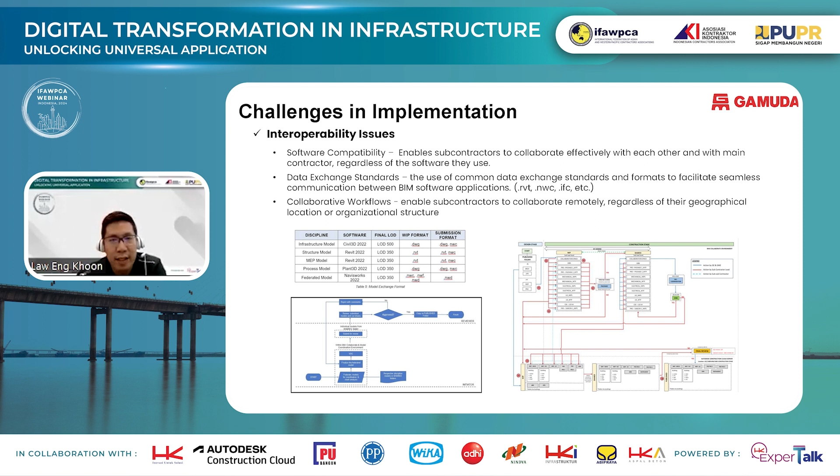With Autodesk Construction Cloud, ACC interoperability between ACC Docs, Autodesk Design Solutions, and the AEC Collection is able to address most of the BIM interoperability challenges we face in this project. We actually went a step further by providing the ACC platform to all our subcontractors involved in this project, encouraging them to use it. Nevertheless, subcontractors should assess their specific interoperability needs and evaluate how ACC, along with other tools, can support their BIM implementation effectively.

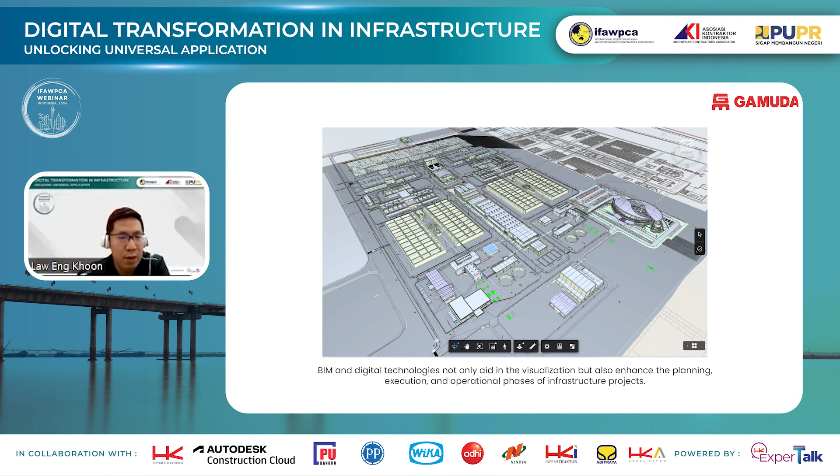This is the model - the overall water treatment plant buildings, tanks, and road infrastructure federated in one single NWD model, which can be viewed in the ACC platform. With easy access to the model, all subcontractors, contractors, and stakeholders are able to view this model and do their coordination.

Our implementation of BIM and digital technology in the Rasau Water Treatment Plant project amplifies our commitment to innovation, excellence, and infrastructure development. As we continue to push the boundaries of technology and embrace digital technology, we remain dedicated to delivering sustainable solutions which enrich life and empower communities.

So as mentioned in our earlier slide intro, our team actually developed an in-house application called BIMAR. This app is designed to enhance collaboration. BIMAR integrates with the existing BIM platform and provides enhanced features tailored to the unique needs of our project. So before I conclude my presentation today, I will leave you with a brief video showcasing the usage of BIMAR for this Rasau water treatment plant.

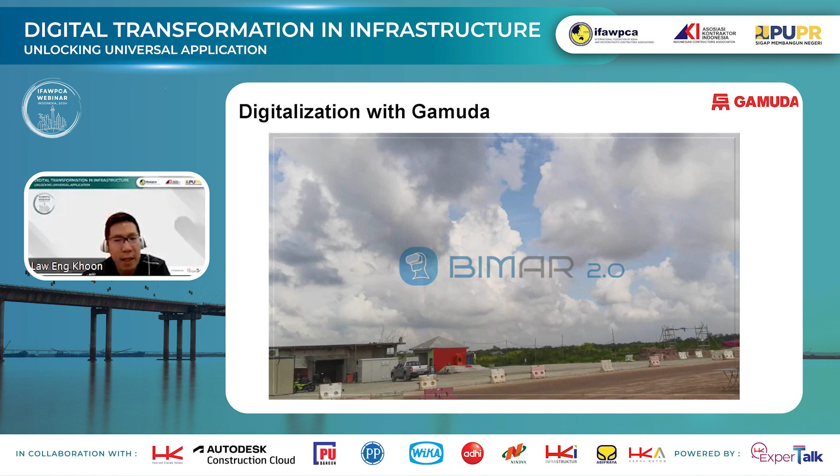Yeah, again, that's all for my presentation today. I think thank you all for your attention.

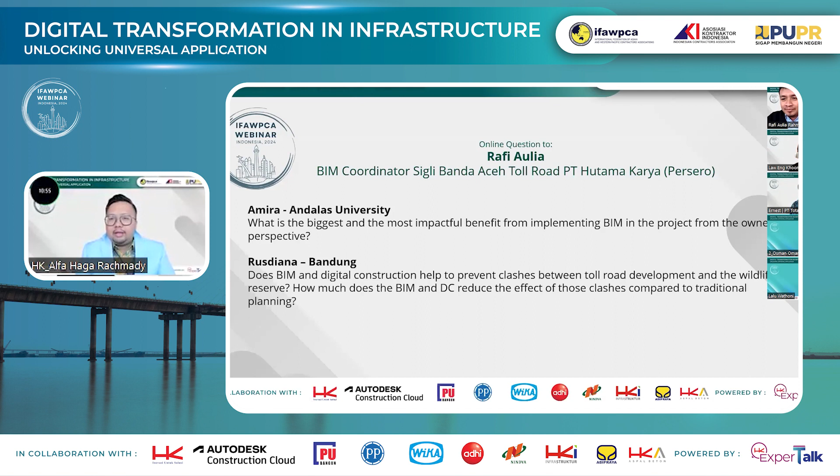From Dhea, Jakarta: how does Autodesk choose the criteria and information for AI to ensure that the decisions or recommendations for sustainability really make a positive impact for people as hoped? Are those controls still in the hands of the designer, or is it automated by the machine learning of the AI? And also, the second question from Mr. Sagar: please present the question.

From Maulana, Ministry of Public Works Indonesia: we've discussed extensively about the current capabilities and application of AI in the construction industry. Looking ahead, what does Autodesk see as the next major development in AI?

How far can AI technology go in enhancing the construction sector, and what are the potential benefits? Additionally, what threats or challenges should we be aware of as we continue to integrate AI into our industry? Okay Sagar, I believe this is intended for you. Sure, thank you, those are heavy questions. So I'm going to answer the first one for Dhea from Jakarta: how does Autodesk choose the criteria and information for AI to ensure the decision or recommendation is sound? The criteria is specifically of two types, two groups.

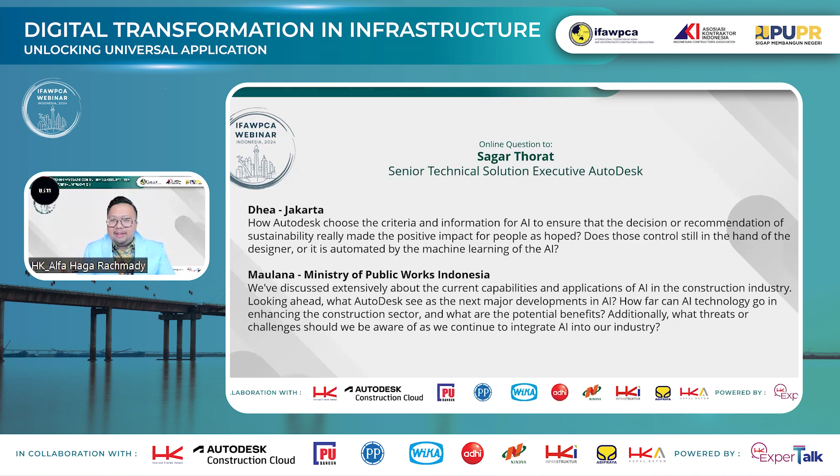So these are the two questions intended for Mr. Law, from Riza, Yogyakarta: Rasau WTP project is a complex project. Does Gamuda implement BIM in the whole aspect of the project or only partially? How to ensure the integration of each aspect of the project, such as survey results and the BIM? And also from Aniza, Universitas 11 Maret: what is the main challenge in the development of BIMAR? How does Gamuda ensure the data visualization in BIMAR is representing the real design?

Mr. Law: Actually, since it's a project, we are implementing BIM in the whole aspect of the project instead of partially. So how do we ensure the integration? We are using a common data environment such as ACC, to ensure aspects of the project such as the survey results and all the BIM model data coordination are on the same platform.

And for the second question, the main challenges: we have a dedicated software developer team inside our DT. They are the team doing all this BIMAR apps work. And how we ensure the data visualized in BIMAR actually presents the real design is we extract the data from our BIM models, which are produced in Revit, Plant 3D, and also Civil 3D. So we federate all these individual discipline models into one model, and we present it in our BIMAR apps. I hope that answers the question.